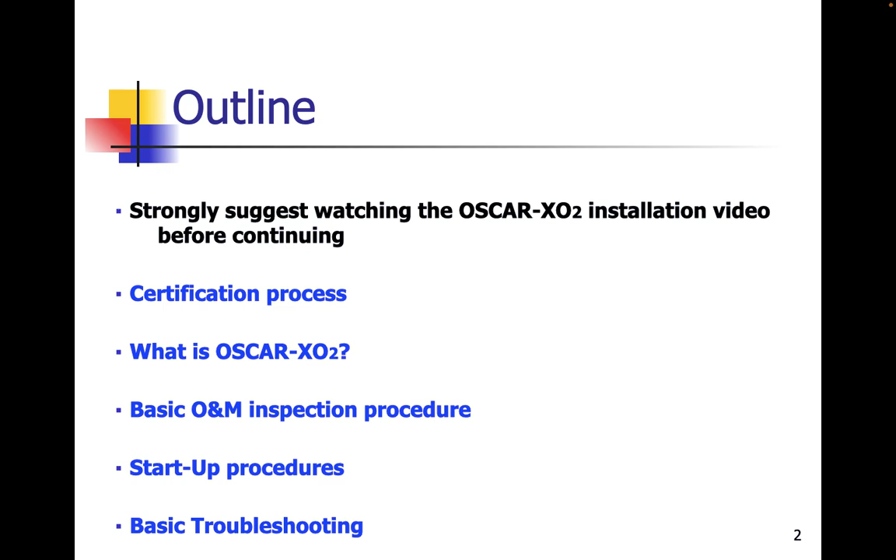The certification process is really pretty simple. You've already started it if you're watching this video now. We either do classroom or mostly online training. Once you've taken a look at the videos, contact us through the email here and we'll get your name on the certified professional list. If there's any additional training you need, whether you need someone to come on site, or you have a question, you can call, or you can always review this training video again.

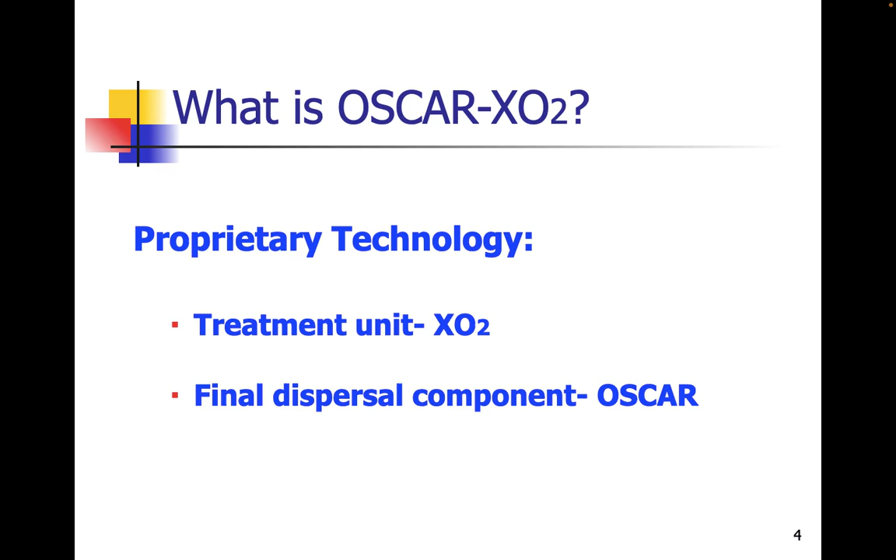So what is an OSCAR-XO2? Basically it's a proprietary treatment technology. As far as operation and maintenance is concerned, we're just going to break it into two sections to make it simple. The XO2 refers to the treatment units, or the treatment tanks. The OSCAR refers to the final dispersal component.

The simplest version of the XO2, for a 500 gallon a day system, or a 4-bedroom system, will be two tanks. Each tank is a double compartment, split exactly the same with a 2/3, 1/3 split. The treatment tank will have a bypass hole through the partition wall, either a hole at 24 inches or so above the floor of the tank, or a T-baffle with the bottom of the baffle about the same height as the flow-through part would be. Pretty much an off-the-shelf kind of thing for most precasters.

This could be a poly tank, concrete tank, or other, whatever's been approved. The discharge tank's only real difference is that we have the same flow-through port as the treatment tank, but on the discharge tank we want that to be about 12 inches off the bottom of the floor, and this can't be a baffle, it has to be a port in the wall. This allows us to accumulate a certain amount of solids, but also have the clarifier allow clear effluent to pass through to where the pump is.

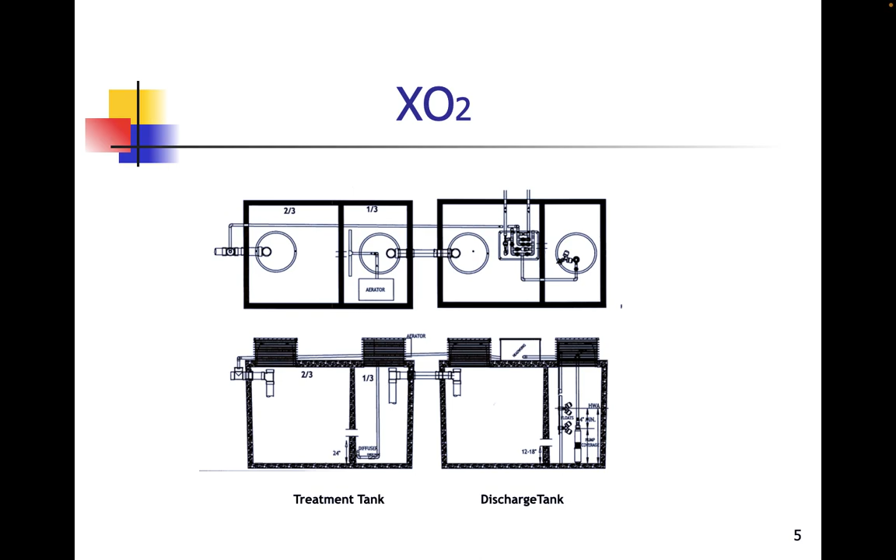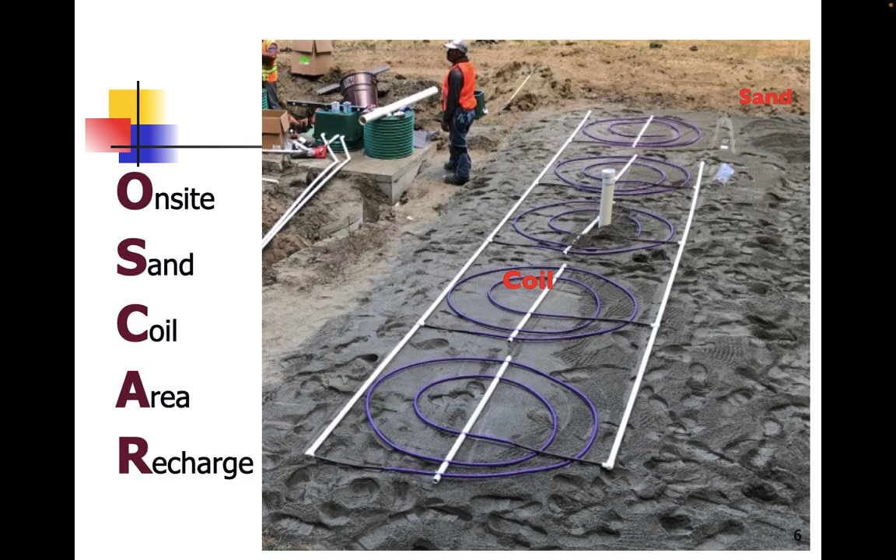Now the OSCAR, or final dispersal component, is just another acronym for an on-site sewage system where we utilize sand and coils of Netafim subsurface drip tubing. Where the sand covers an area of the soil, we call that the recharge area or the disposal area. We can break the OSCAR down into two basic parts, the coils and the sand. Other than the plumbing to hook them together, those are the two main components. It's a pretty simple technology.

To give you an idea of what they look like from the side view, if you're on a flat site, the coil should be somewhere right around the center of the area lengthwise. Coils are going to be flat or level. On a sloping site, we're going to have the coils more toward the upper end of the basal area. Again, the coils need to be level, so the installer will have put a little more sand underneath the downslope side. Other than that, they'll work hydraulically the exact same way.

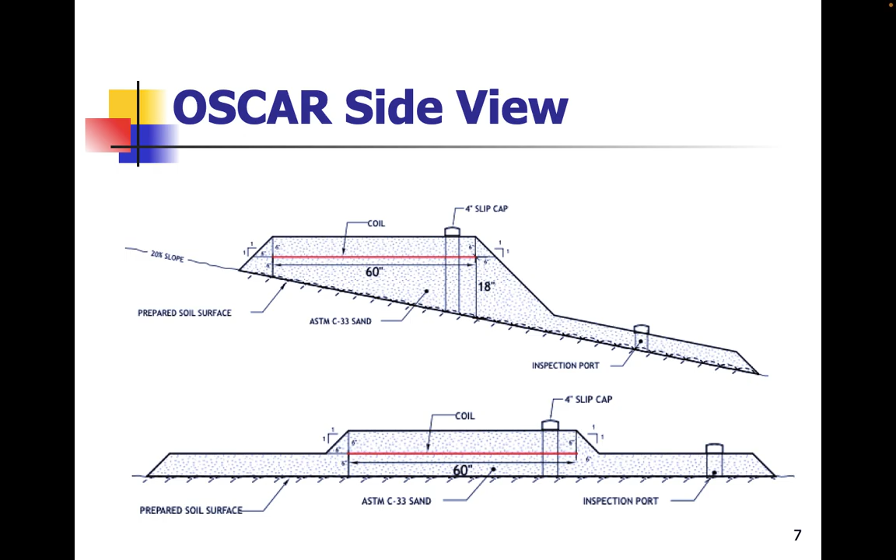Now that you have an idea of what the OSCAR-XO2 would be, what would be under the ground, we're going to go through a number of checks. First, we make visual observations of what the Oscar looks like. We measure solids accumulations in the various tanks, make sure the aerator is functioning correctly, and go through startup procedures, which allow us to know how the system is working without electrical equipment or knowing the wiring. We use pressures and flows to make those determinations, and ultimately record the observations we've seen.

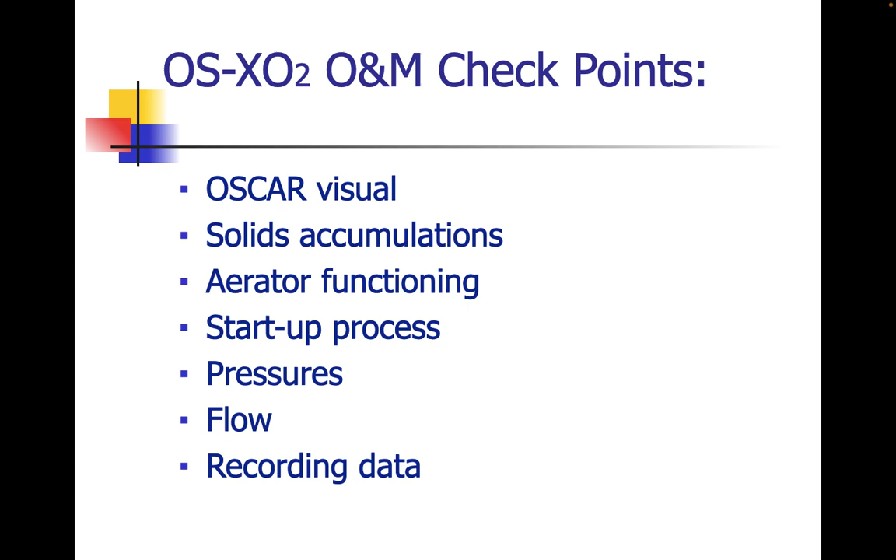Looking at some visuals, these pictures show that Oscars, depending on how long they've been in and what climate they're in, may have different looks depending on circumstances. In the upper left corner, you can see where the Oscar coils are - circles of lush green grass growth, while the grass alongside is dried out. This picture was taken in late summer, early fall, hadn't been raining for a while. The normal grass dried out, but because it's being dosed with treated effluent around the coils, that stays green. If you went back in March or April after it's been raining all winter, you couldn't tell where the coils are because everything looks the same.

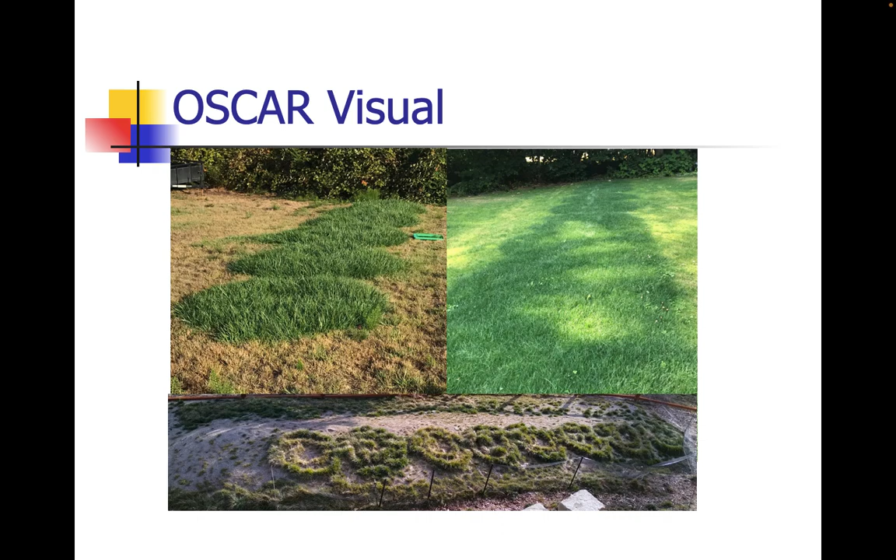The picture to the right is springtime at another site where you can tell where the coils are by the green coloring, but it's within a grass area that's all green around it as well. The bottom picture is from a fairly new system, in for probably not even a year, in a climate extremely hot and dry in summer, very cold with snow in winter. So grass is either going dormant in winter or getting dried out badly in summer. Over the years, this green striping pattern from the coils will fill in, becoming more like the upper left picture rather than showing individual coil lines. These are all examples of properly functioning Oscar systems, but you can see a wide variety of looks depending on area and time of year.

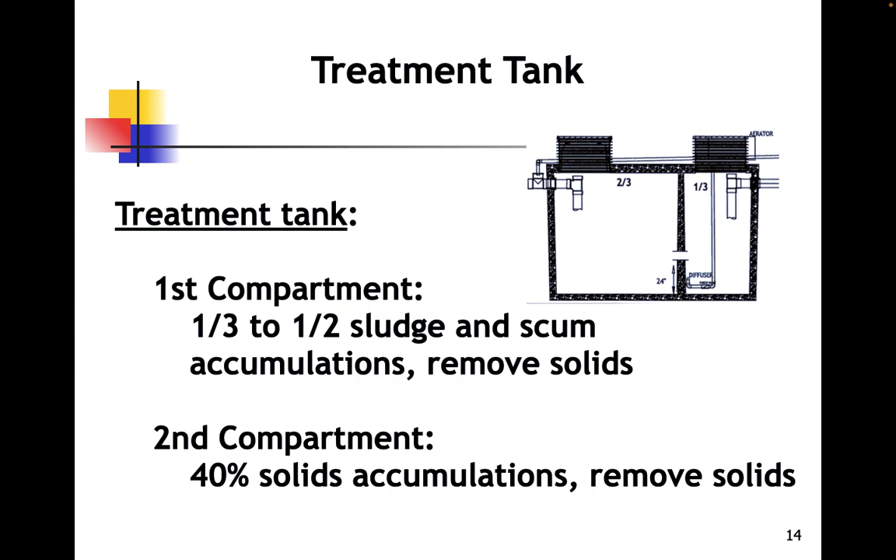Now, using standard sludge judge or other measuring devices for finding the sludge and scum layers in the first compartment, I'm going to assume that most everybody's already had an idea how to do that. In the second compartment, it's a little bit different.

What we're going to have, if we look inside that aeration chamber, we should see kind of a brownish-looking material. You can see bubbles are coming up. They're somewhat diffuse, but they'll come to the surface, and then the water's making somewhat of a rolling action. We'll have a little bit of foam or suds on the top.

What we'll do there is, while that's on, is we'll just collect a sample of the liquid, and we can put it in really any container. We can put it in a 2-liter Coke bottle. We can put it in here an Imhoff cone or a mason jar. It doesn't matter. But you can see the middle picture.

We've just placed that liquid into that Imhoff cone, and stuff settles out pretty quickly, but there's a lot of stuff in suspension that within about 20 minutes, and you see the second picture to the right, that material has settled out. And so we really want that liquid to set for about 20 minutes while we're doing some other checks to indicate how much solids we've accumulated inside their aeration chamber.

Here it's hardly any at all. When you look as a percentage, it's probably more like 2 or 3% relative to the amount of liquid volume we have in the tank.

Now on the discharge side, we're looking at the large compartment we're going to call the clarifier, and the kind of pump chamber is going to be on the second side where the pump is. But what we're going to do on these tanks is the floats are set at about 22 inches off the bottom of the floor. So we're going to flood the tank at least to that level. And our flow through port's going to be at about 12 inches so that we have the ability in the clarifier to accumulate floating material as well as settled material in the tank.

We can get up to about 12 inches on the bottom and a little bit on the top. When the clarifier does get somewhere close to 12 inches accumulation on the bottom, probably time to get that cleaned out. We don't want to carry over a bunch of the solids into the pump chamber side.

The pump tank will accumulate solids over time. It will take a long time, but it will accumulate over time. When we get about 8-9 inches of accumulation there is when we want to pump the tank. There really shouldn't be a lot. It should take quite a long time, while everything is working the way it's supposed to, to accumulate things in this tank, but it will, and so we just need to be mindful of that as we move forward.

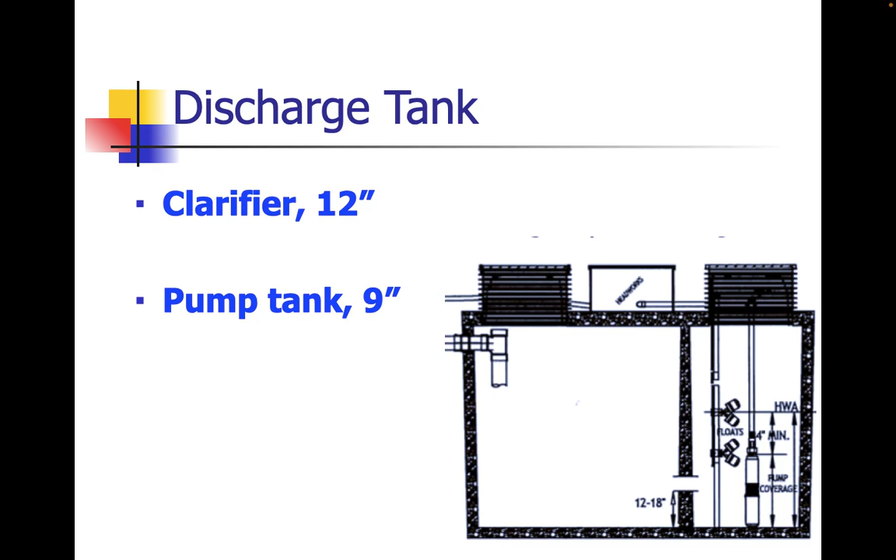Now once we've got a visual of what the OSCAR looked like, everything's cool, we've got the solids measurements or an idea of what we have there. The next thing we need to look at is how's the equipment actually working? Are the valves, the floats, the pumps, aerators, and so forth, are they doing what they're supposed to? And we're going to look at that, or know what they're doing, what they're supposed to, depending upon the flows and the pressures that we're able to see during our startup check.

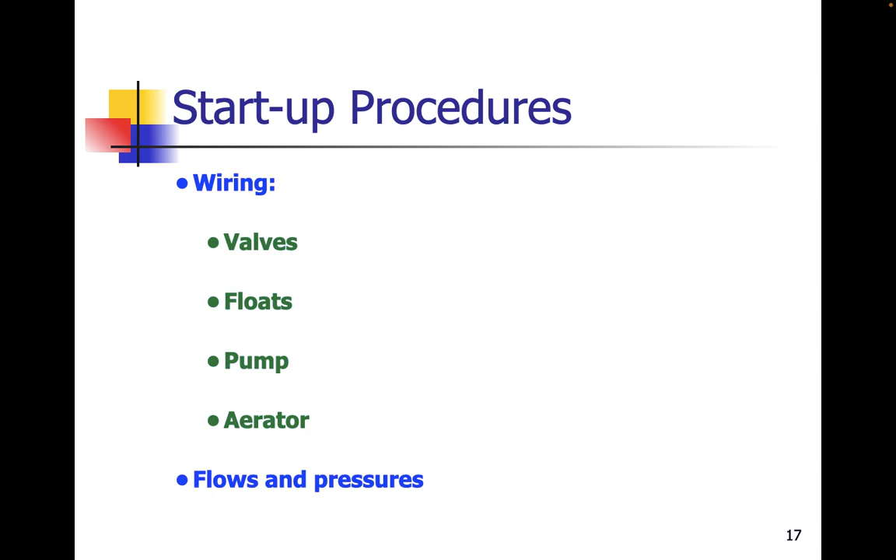Now to check the floats, they're pretty easy, pretty simple. There's only 2, so you can raise the top float. There's about a 5-second delay in the control panel, so after 5 seconds we should hear an alarm sound, and the light on the front of the panel should illuminate.

The bottom float, we'd have to raise it up, but it might take several minutes for the pump to come on. The cycles are usually about 3 minutes off, about 30 seconds on. So depending on where the cycle is, we may be standing there with that float held up for quite a long time. The best option I like to use is what we call checking the input screen.

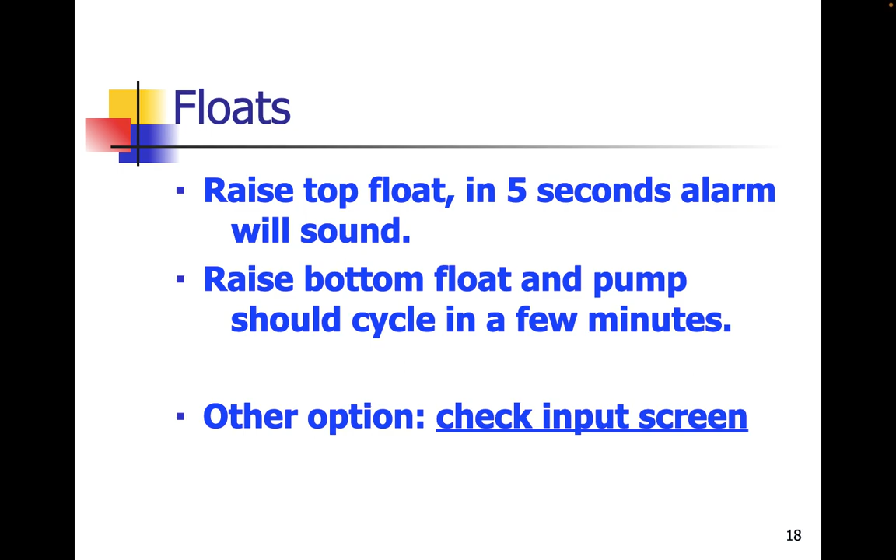Inside the control panel, we have the capability of being able to diagnose or see what the panel is seeing. On the inside door of the panel, we have what I call supplemental wiring diagrams. I've got an example of a portion of one here, where we're showing the bottom float on the left and the top float on the right. You can see where the leads for each of the floats land in the terminals: the bottom float on 1, the top float on 2.

Now this 1 and 2 correspond to the input indicators in the control panel. When you look at the Siemens LOGO!, if you don't see the screen where it says pump cycles and pump runtime, and it says something else, and you're not sure where to go, the easiest thing is to turn off the circuit breaker for the control power or the main power to the control panel just for a few seconds and turn it back on.

This will be the first screen that comes up. It's an easy one to locate. We've got the up and down, left and right arrows on the right, so we'll use the down arrow and go down 3 or 4 spaces to where the date and time is. It doesn't matter if it's correct or flashing. Then we use the left or right arrow and go over to the screen that has a large capital I in the upper left corner. That indicates it's the input screen.

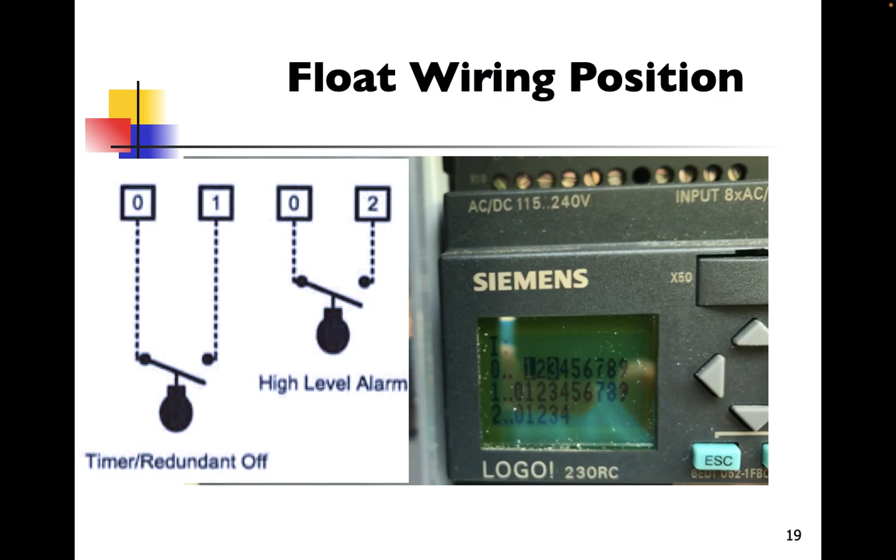The other thing we can do is, once we look at that input screen and it says the bottom float is up or closed, but it's indicating the top float is down, we should look inside the pump chamber and see the bottom float being lifted by the water, and it should be pointing up. But the top float should be hanging down. We should physically verify that's in fact the case.

The way this drawing is, some people get confused - they think there are 4 floats in the tank, but there are actually only 2. The draftsman just showed that the float can either be up or it can be down.

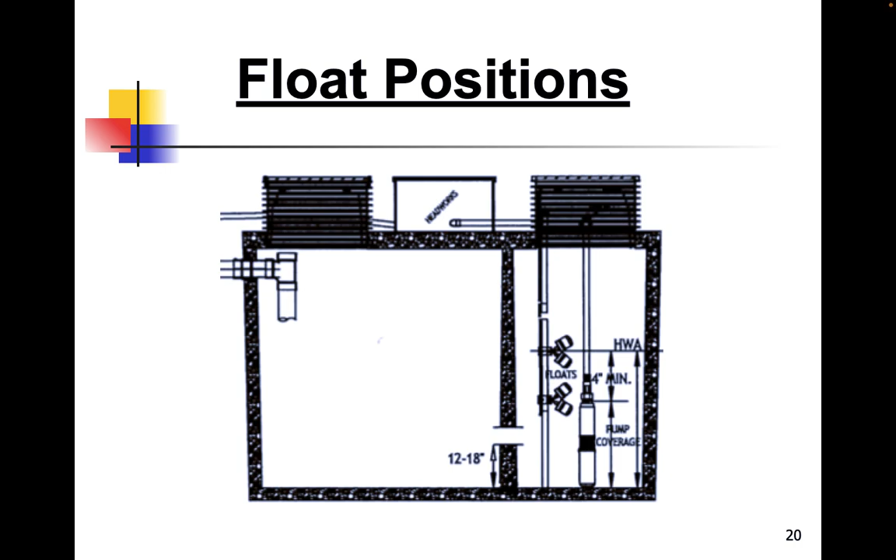When we're doing a dose, what's actually happening is we're pumping water from a pump inside the tank, it goes through our Headworks, out to the OSCAR coils, drips out of the coils, and we're good to go. So in order to understand how the controls work, we really need to start with the Headworks. That's kind of where everything is happening - it's kind of the guts of the unit.

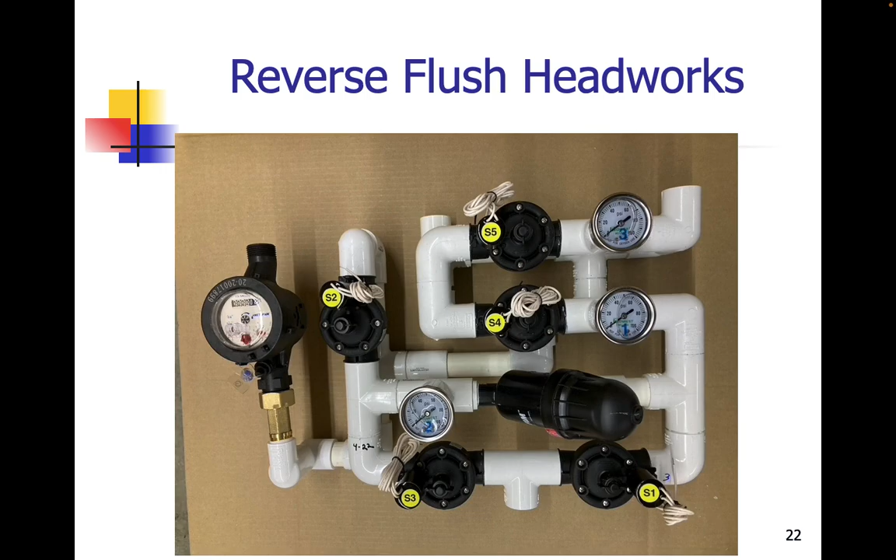What the Headworks has is 3 main components. The first is we have 5 solenoid valves labeled S1 through S5. We have 3 pressure gauges labeled 1, 2, and 3 - one is on the inlet of the pressure to the filter, one is on the downside of the filter, and number 3 is after all the coils. The disc filter is located between gauges 1 and 2. Finally, on the very far left is the flow meter. We're going to be using all those to tell whether the system is functioning correctly the way it should or not.

Thing to remember, the valves we're using, the solenoid valves, are all normally closed. That means the valves need to have power, 24 volts AC, and at least 8 psi in hydraulic pressure in order for them to open. If they don't have both of those, the valve is shut and water won't go through it.

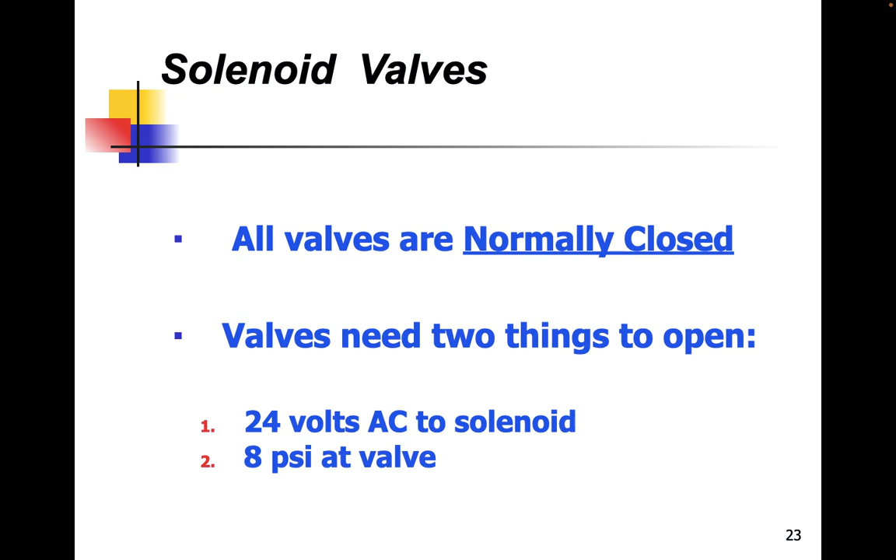The positions for wirings with V's are for our valves. V1 through V3 correspond to valves 1 and 2, valves 3 and 4, and valve 5, and then N is going to be a common wire for all those valves.

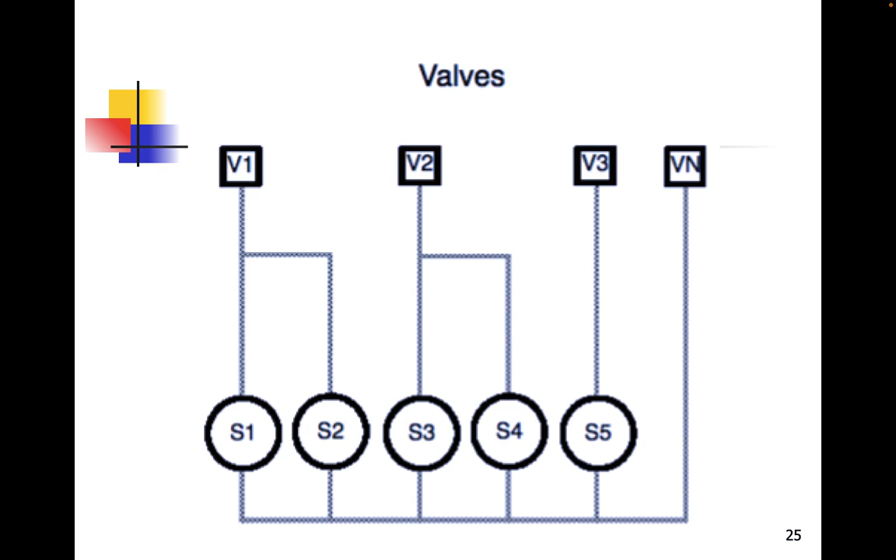So if we want to simulate a dose going to the OSCAR, we can use these toggle switches. The first thing we do is we turn all of the toggle switches to the off position. That way the control panel's not making things happen, only we are.

Then what we'll do is we'll turn the valves 1 and 2 toggle switch to hand, and that'll give electrical impulse to the solenoids. And then we'll turn pump on the top to hand. That'll give us our hydraulic flow to the valves.

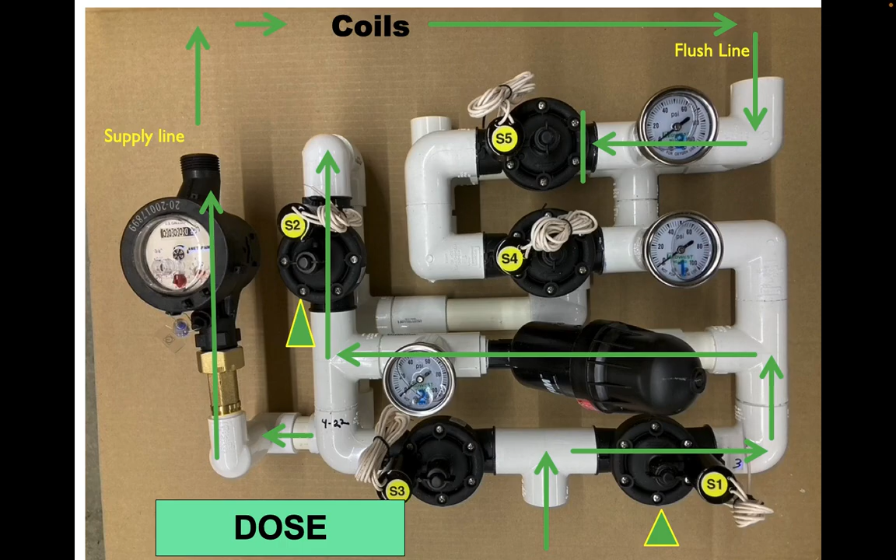And what that'll look like, here's our flow path. We're going to have solenoids S1 and S2 energized. Pump is on, and so the flow now will go through the headworks in this fashion. Valves 3, 4, and 5 are closed, so it's like they don't even exist, they're just a blockage. So the flow has to go through S1, go through our filter, go through solenoid 2 or valve 2, and then out our flow meter, out the supply line to the coils. That gives us our dose.

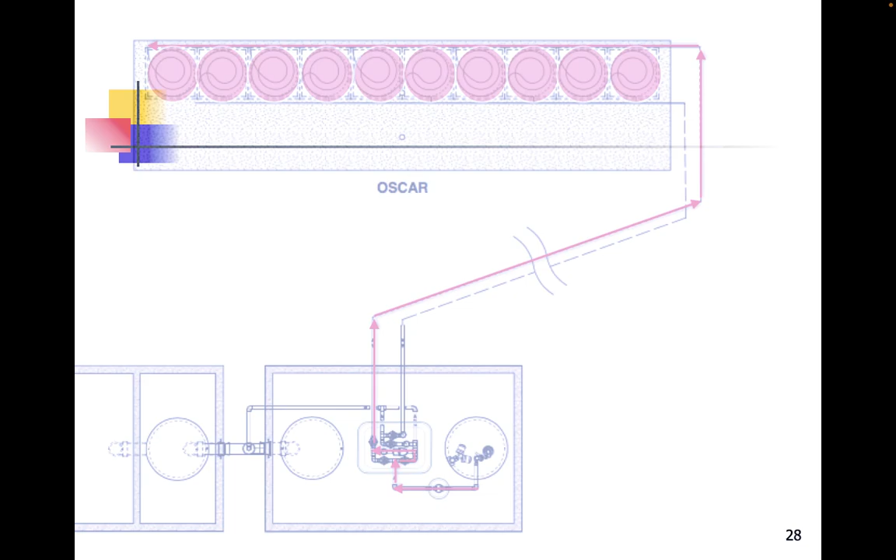Then we can verify that that's acting correctly. First of all, this is what it would look like. We've seen this picture before. But in the headworks, we are going to be able to recognize these pressures on all 3 gauges, gauges 1, 2, and 3.

It'll be about 50 psi. They may vary depending upon the pump and various other factors, but give or take, the max it's ever going to see is 52 psi with the pump that we use. You're never going to see much less than maybe 45 psi, but you're really going to see pretty much all the same value. Gauge 3 may be a little less than gauge 1 and 2, but again, it's going to be real close.

Now our flow, depending upon the coils and the number of coils that we have, each OS50 coil will allow, at full pressurization, about 0.35 gallons a minute per coil into the sand. Now an OS100 or the larger coils are going to allow twice that at 0.7 gallons a minute once we get pressurized.

Now if we want to figure the flow out with our flow meter, we got to understand a little bit of how the flow meter works. First of all, looking at what I call the odometer, it always has 2 black round numbers and then 1 number painted on the side.

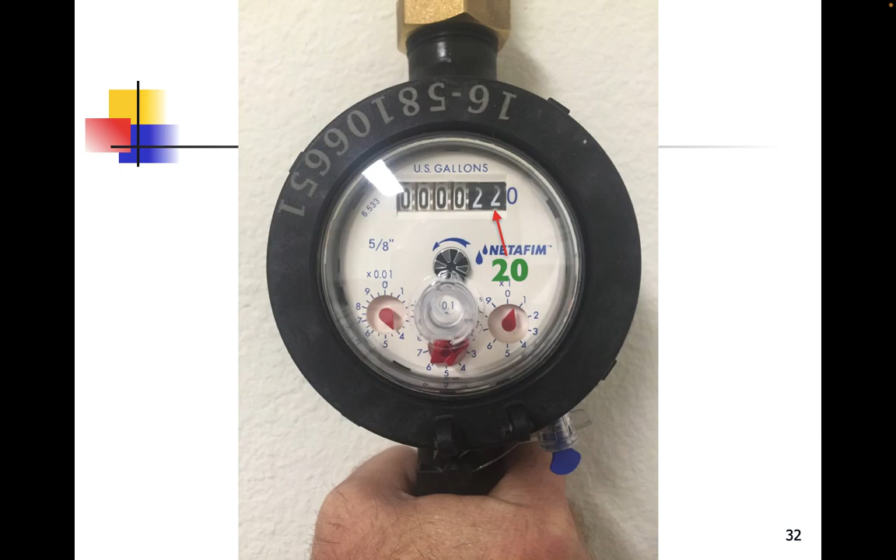The first number here is 2, that's black. It's not 0.2, it's 200. The second position, which is another 2, it's actually worth 20 or 20 gallons. And then when we want to look at the single digits or the 1 gallon, here we have a 0 painted on the face.

We have to look at the gauge or the dial on the right. You'll see that dial is identified as X1. It means each digit around that dial is worth 1 gallon. If you look at the center dial, you can barely see it within that little window, but it's at 0.1. Each digit is 1/10 of a gallon. And on the far left, each digit is 1/100th of a gallon.

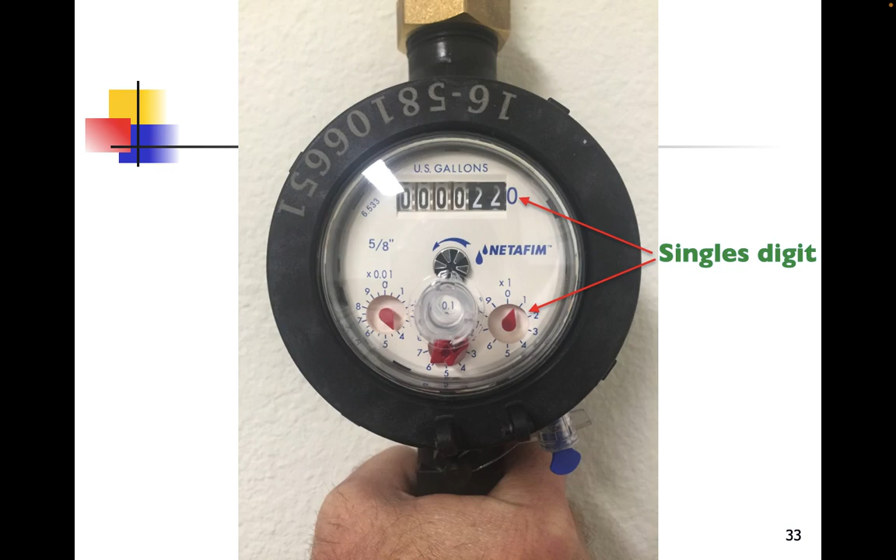So what's interesting is, for the most part, when we're looking at hydraulics, we're not too concerned about what the actual odometer is. We're really going to be concerned about what that middle dial does, because each rotation is a full gallon. So all we need to do is just time a minute and count the rotations there to know how many gallons a minute flow we have.

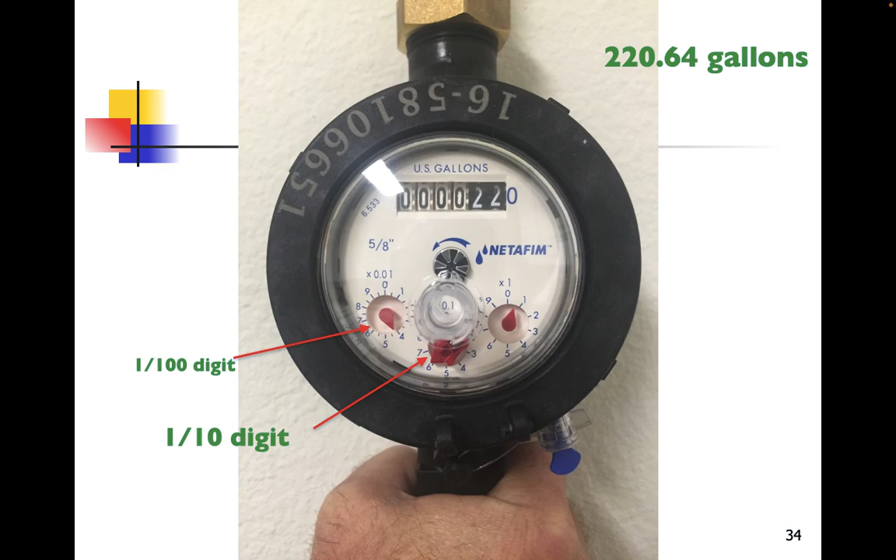So let's pretend we've got a system that has 10 OS50 coils. In other words, our flow should be 0.35 times 10, or about 3.5 gallons a minute. If we have OS100s, then you can do the math there. But this is about the only real math that needs to be done in order to do the operation check on this system.

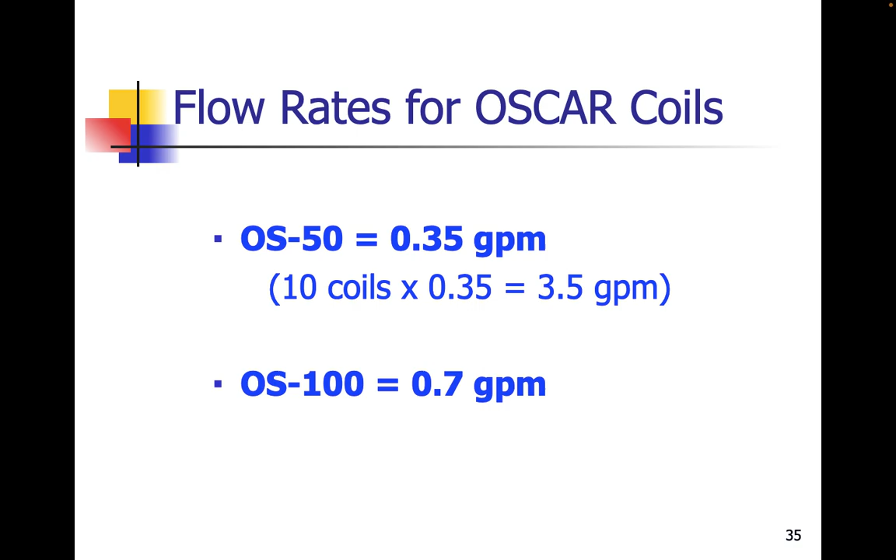What we need to do first is turn the pump on with valves 1 and 2, but we need to let the pressure stabilize. Once they're stabilized, then we can time how much flow we have going through there. If we start timing as soon as the pump comes on, the problem is that we're going to be filling a pipe up, and we're really not measuring flow out the emitter. We're just having a void pipe that we're filling.

So what that looks like: when the pump first comes on, you'll see that the dials actually start to turn quite rapidly. Then at the point where the system is fully pressurized, things slow down, and they slow to the rate at which water can now leave the emitters. These are all pressure compensating emitters, so once they get to pressure, they only allow a certain level out, and that's it.

You see this will climb up to about 9/10 of a gallon on that middle dial, and it'll stop. So if we were timing this, we would have timed for a minute. Like I say, just count the rotations. But you'll notice there is another dial. It's called a leak detector in the middle, and it turns very easily with hardly any water going through.

The key here is sometimes the systems are set up to drain out, especially in colder climates. Once we watch the pump turn off on its own, if the dials start to turn backwards, which they can, we have to know how much they turn backwards to know how much water is running back in the tanks. So we'll have to keep track of how many rotations we had going out and how many reverse rotations we had coming back, to know what our net amount of water that actually got dosed out to the field is. And we'll need to record that.

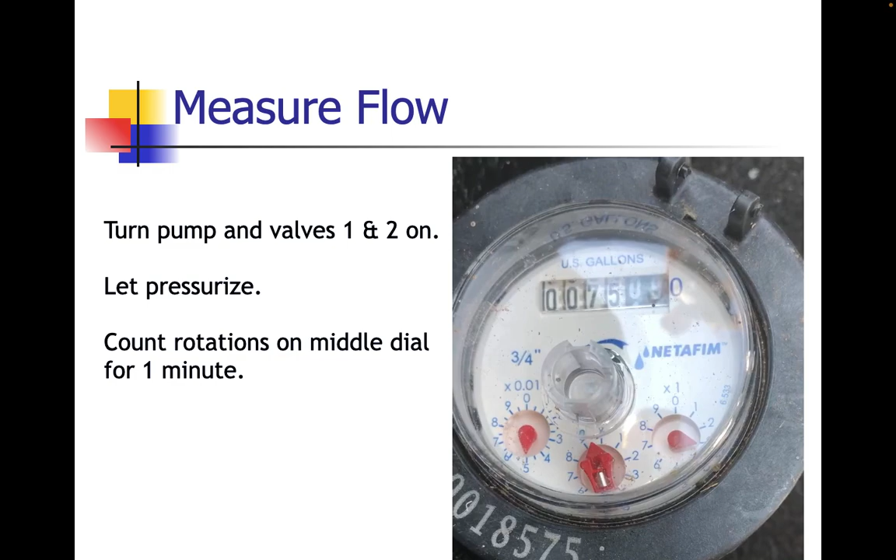The next thing we want to do is a filter flush. With our disc filters, the way they're set up, the flow of water will come from the left into the housing of the filter. It will go through the outside of the disc filter into the inside of the cartridge, then through the center out to the emitters. That's the normal forward flush, giving us the cleanest quality of effluent going out to the emitters, then into the OSCAR.

In order to make this work on a long-term basis, we automatically backflush the system. So we reverse the flow, going from the left to the right to the left. Water will be coming to the inside of the disc filter, somewhat expanding the disc filters apart a little bit and blasting a large volume of water through there to clean that out.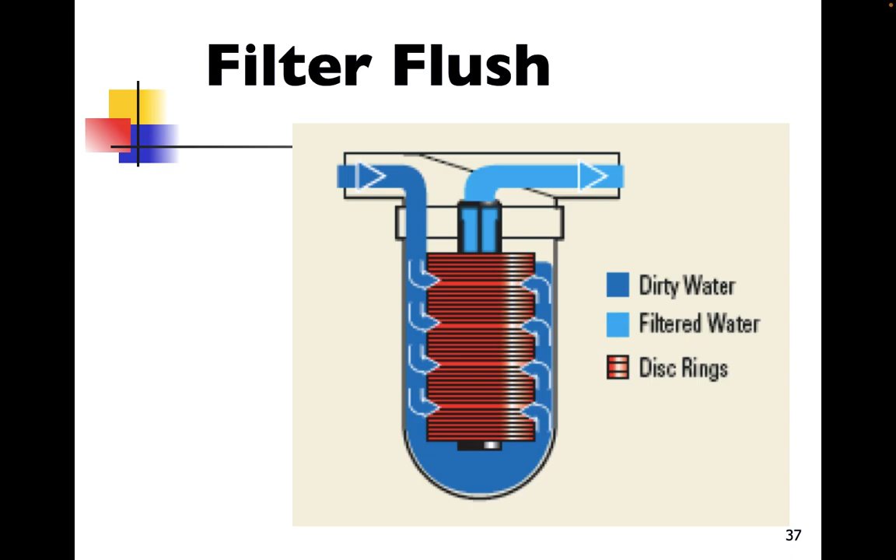To simulate that, we will turn all the toggle switches to off. We will then turn valves 3 and 4 toggle switch to hand, and then turn the pump to hand.

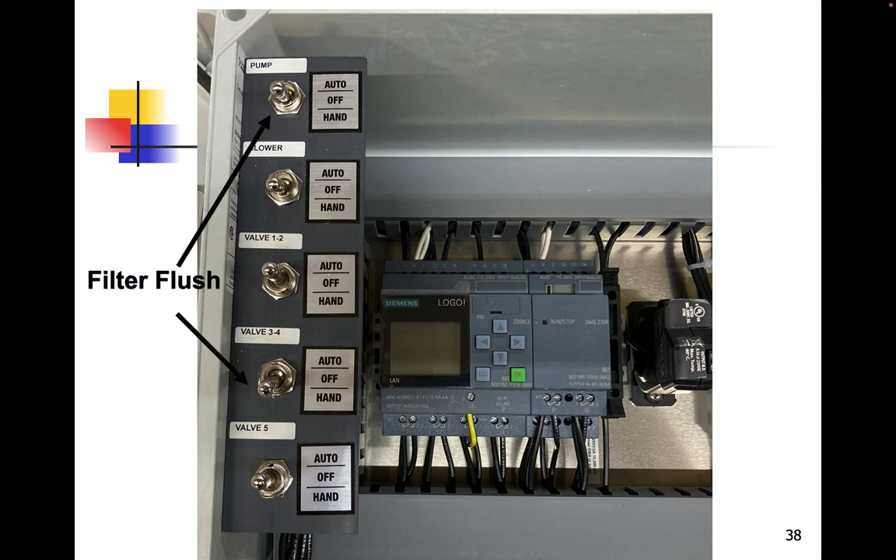In our Headworks, we'll still come into the same influent T, but instead of going through S1, we're going to go through S3. It'll go backwards through the disc filter, and then all the water will go through solenoid 4, and then back to the tank. So water's just going to get pumped out of the tank, and it's just coming right back in the tank.

This will come at a very high rate. If we were to observe the water coming in the tank, it'll just about fill up that 4-inch inlet, about 25 to 28 gallons a minute of water flowing through there. So it's a very high rate, and we're doing a really good job of cleaning out that disc filter.

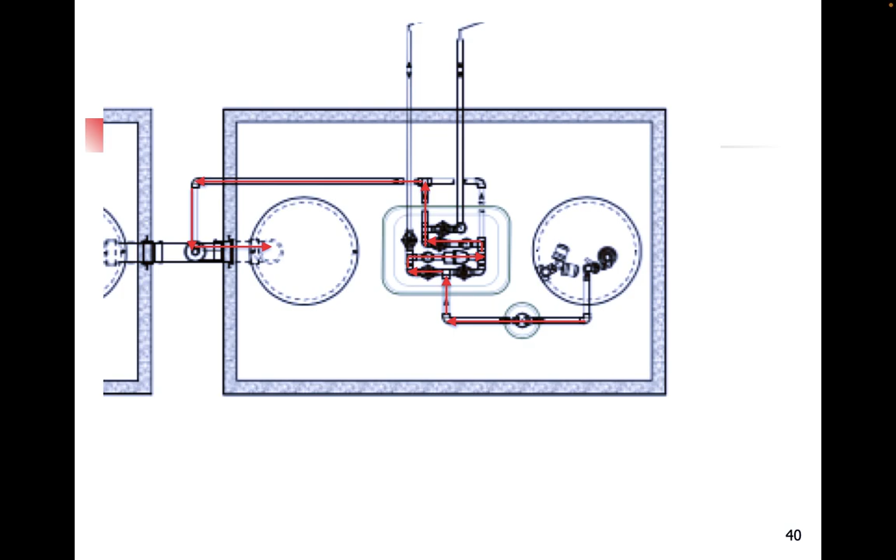Now we'll be able to identify through our pressure gauges and flow meter if it's working correctly. We'll only be looking at pressures on 2 of them, gauges 1 and 2. Because we're going backwards, gauge 2 is going to get the water and pressure first, so it's going to be about 20 psi. Gauge 1 is going to be about 10 psi, and because we have no water going through or by gauge 3, it's going to be 0.

Now, it's not so much the actual number of these pressures, it's going to be the relationship. You see gauge 2 is about twice of what gauge 1 is. Sometimes you'll see 15 and 8, 18 and 9, something like that. It's very rarely ever over 20, but it could be lower than that. As long as you have that 2-to-1 ratio between gauge 2 and 1, with 0 going through 3, you're good to go.

And you'll be registering no flow on the flow meter because we don't go through it when we do this particular function.

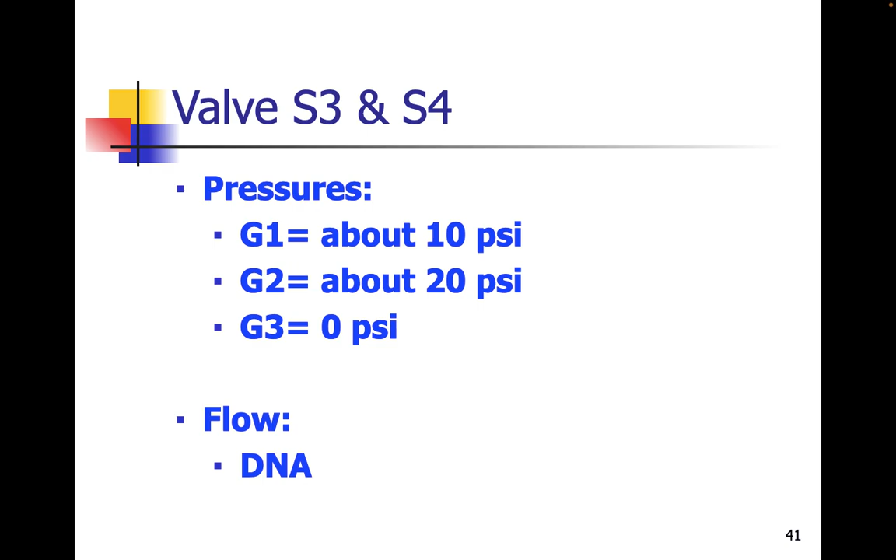Now, the next sequence is the coil flush. Now that we've got the disc filter clean, we want to actually clean the coils out. Again, we're going to turn all the toggles to off, and then we'll turn on valve 5 to hand. We'll turn valves 1 and 2 to hand, and the pump to hand.

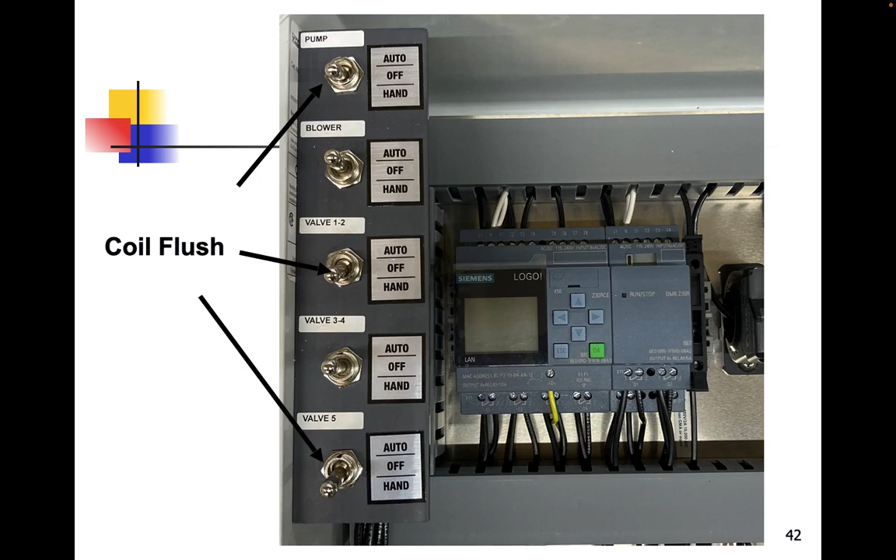It's going to be similar to when we were dosing, the same flow path. We're going to go through solenoid 1, through the disc filter, through solenoid 2, out the flow meter, out to the coils. But now, because valve 5 is open, all that excess pressure and flow is able to go through and back into the tanks.

So that's what the flow path will look like. If we were to observe the water coming into the inlet of the tank, we would probably see about half of the flow that we saw when we were doing just the disc filter. We've got friction loss going in and out to all the coils, some pressure and flow loss in the coils, so we'd expect to see less flow coming into the tank.

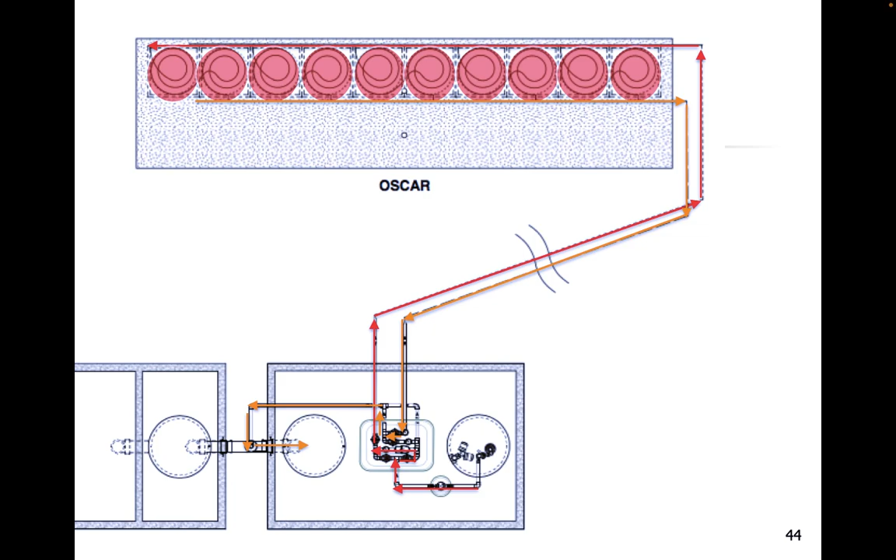Now our pressures are going to be a little bit different too. Because we're going with the right direction, we're going to see about the same pressure in gauges 1 and 2, roughly about 40 psi. Sometimes we'll see down as low as 35, sometimes in the low 40s. But again, they're going to be just about the same on gauge 1 and 2. Gauge 3 typically will have no pressure recorded, you might see the needle bouncing a little bit. I've seen pressures up to not quite 4 or 5, but that's very rare.

So we're going to see somewhere in those ballparks, the 40-ish to 0, depending on whether we're looking at gauge 1, 2, or 3. And the flow on the meter should be greater than 12 gallons a minute. That would be considered normal on a single-family residence application.

If we get numbers much different than on the dose, on the filter flush, and then on the coil flush, that means there's probably something askew, something's not working correctly.

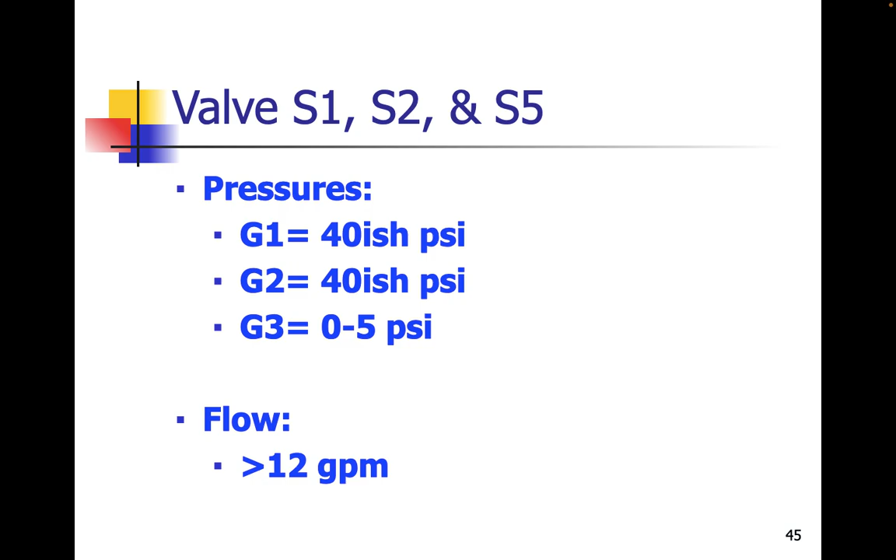So what's really been happening here on the normal automatic sequence, valve function 1, we call it the dose, it's set for 3 minutes off, 30 seconds on. That will do that 90 times, and we'll repeat that. Then that'll get us about

6 hours, roughly. Once we go through the 90 doses, the next sequence will get 1 dose of the disc filter back flush. It'll be 30 seconds off, then it'll come on for 15 seconds, clean out that disc filter, and then it'll be off. It only does that 1 time.

Then it'll go to valve function 3, which is off for about 30 seconds, and then on for 2 minutes. We're going to flush those coils long enough so that we can get any debris that's there out, and have it on for long enough where any debris will then actually flush back into the tank.

So it'll be there so that when the pump shuts off, we don't get any drain back to where we don't want it. After that coil flush, we go back to our 90 V1 dose counts, and we just repeat those 3 valve functions over again: valve 1, 2, and 3. That's what it is, 24/7. As long as there's water available to close that input number 1 or raise the bottom float, we will go through these sequences until that float drops.

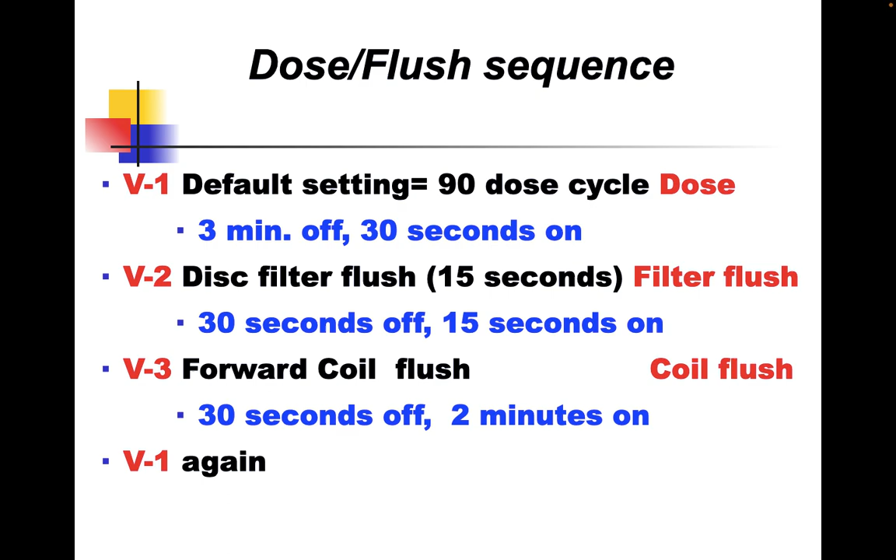Now we've completed the startup. We've checked all the floats. We know those are doing what they're supposed to. We know the pump works. The solenoid valves are doing what they're supposed to. We've verified that with the pressures and flows. We've recorded those.

And now what we want to do is leave all the toggle switches in the auto position, or up. The circuit breakers are up. The toggle switches are up. If we do nothing else, if we remember that, at least the system will be on, or what it's supposed to be, when we leave.

Now, the one thing that we haven't looked at yet is our aerator, and there's a couple of things that we need to look at when it comes to the aerator. When we show on our illustrations the aerator, we're showing it on top of the tank. Typically, that's not where it's going to be installed. The aerator box that the aerator is in, we want the bottom of that box at an elevation at least as high as the top of the riser going to the tank.

What we're trying to avoid is if for some reason our tanks get flooded, power outage, whatever the case may be, we're not going to get a bunch of water into our aerator that would destroy it. Our solenoid valves, our floats, our pumps, they're all made for water. The flow meter can be submerged for a period of time and it won't hurt them a bit, so I'm not too concerned about their relative elevation as far as that goes. But the aerator, I am.

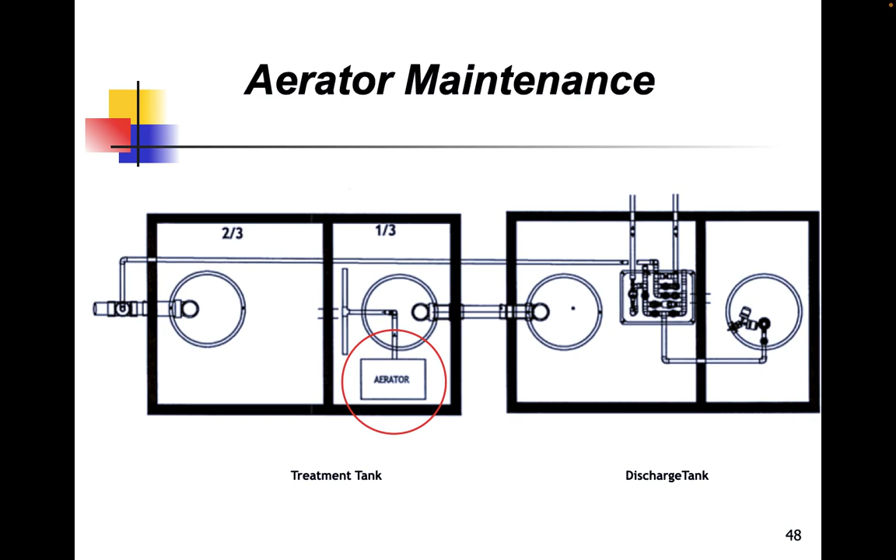So we'll probably see the aerator around to the side of the house where there's no door coming in and out, no place for the family to congregate, and it's something that's somewhat secluded. Or it may be further out in the yard, around trees or bushes or rocks or something where it's not so obvious to see. But if you want to do maintenance on it, you need to know where to look.

It'll then move toward the outlet and then down again, so it's got this rotational motion. The odors, musty smell, definitely smell like we're in a septic tank, but it shouldn't be putrid. It shouldn't knock us down when everything's working normally. So anyway, that's the first indicator: yes, the aerator is working and we're good.

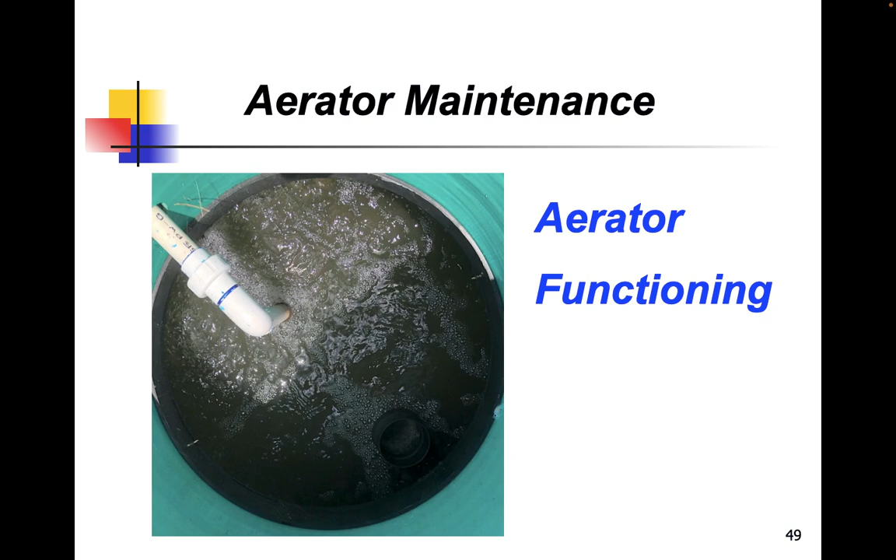Inside the box, you will find the aerator. It's a green lid with a kind of blue turquoise bottom. You'll see a splice box in there for our power cord coming in and out, and down at the bottom of the box there's a 2-inch pipe. That's our air inlet, our air intake, where the aerator draws its air from.

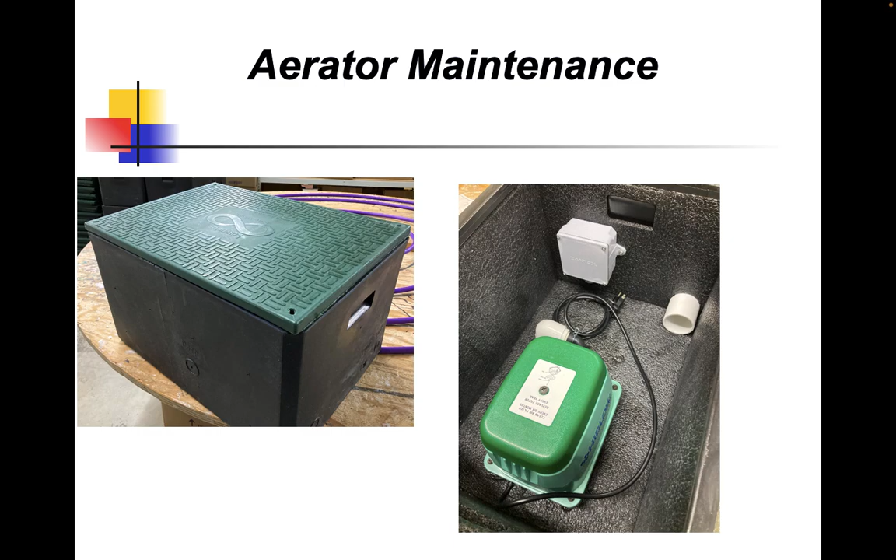Looking at the other side of the box, the air intake has a couple of 90-degree bends. This way, if it rains, water can't get into it. It'll just drop off, but we'll still be able to pull air in no matter what.

Now, there is an air filter inside. It's a very coarse air filter. One little screw comes off the top—either Phillips or flat screwdriver—and the top just lifts off, the green top.

Under there is this tan-looking filter, when it's new anyway. It may catch earwigs, sticks, and bits of dirt. I would shake that out or just replace it altogether—that might be the best way. They're fairly inexpensive and not secured in there in any way. You can just pull them out, pop another one in, put the lid back on, put the screw in, and you're done.

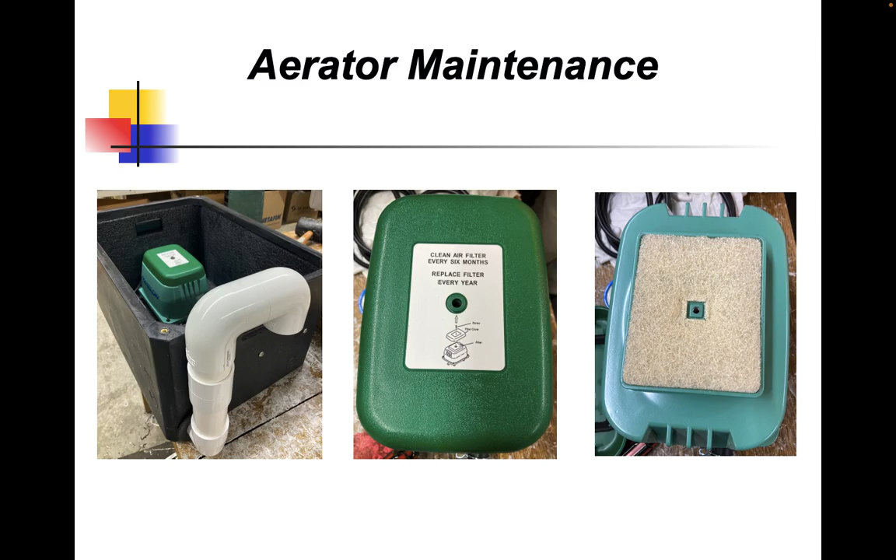Now, the last thing we need to do with the aerator is test the alarm. We use a pressure sensor and a current sensor to indicate whether we've got an aerator failure or not.

So if all of our toggle switches are in the up position and our circuit breakers are all up and everything's working, everything is fine. If we take the circuit breaker for the blower or aerator and turn it off while everything else is left on, the controller will sense that we no longer have power or current going to the aerator, and it'll sound an alarm. Once the alarm sounds, we know the current sensor is still working and the aerator has been working, so we can turn the blower back on and we're good to go.

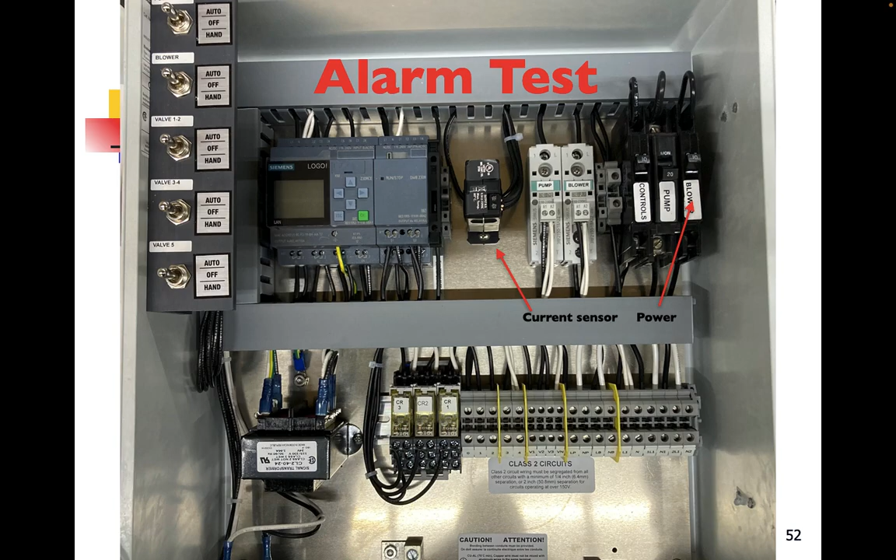So now that we've done all the checks—the visuals, measured the solids accumulations, done the hydraulics test for all the valves and pumps, and serviced the aerator—we really need to record those things. Those are the kinds of areas of information that we want to have down.

Each local health jurisdiction or state jurisdiction may have different requirements for what they want written down, but these 5 areas are going to be recorded. We may have to write the pressures during not only the dose cycle but the backflush cycle. They may want the flow rates during the dose as well as the backflush or flush. And on the solids accumulations, we'll have to break that down between the 2 chambers and the 2 tanks, indicating when it'll need to be pumped, and then what's going on with the aerator.

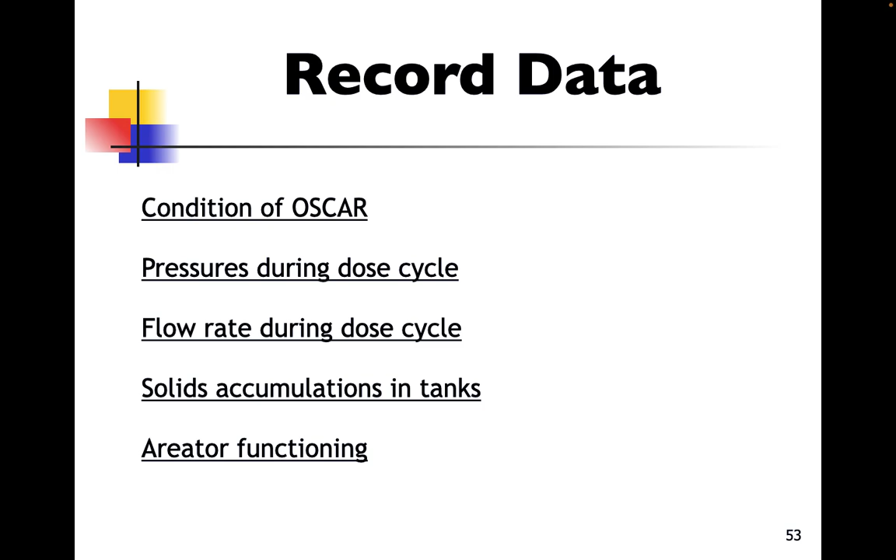Well, once you get to that point, you've done your first check.